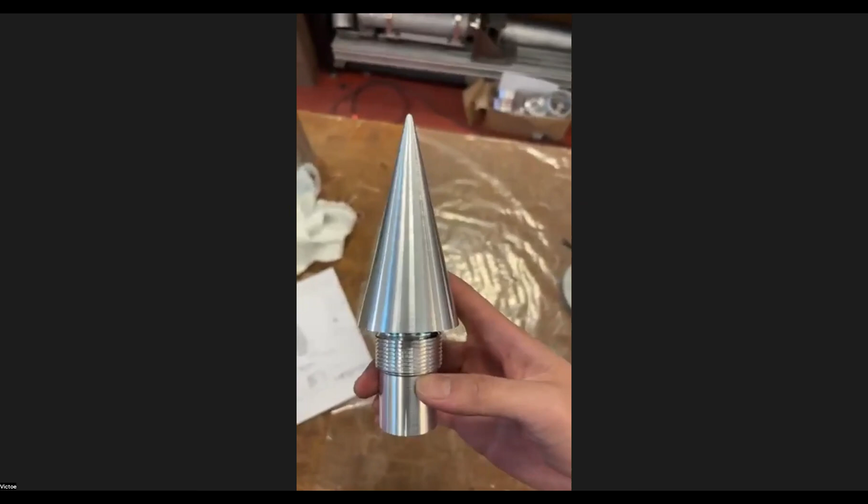Hang on just a second. I am looking for how I can change my view so I can just be looking at you. I'm used to seeing a button that will give me a speaker view, and I'm not seeing that now. In the top right-hand corner for me, next to the recording button, there's a button that says view, and you can choose it from there. What I've got there instead is a leave meeting button, which I do not want to press. Are you able to right click and pin his video? Maybe just click my video and then it will pop up. Okay. Found speaker view. It was not how I expected.

Okay, so let's start over again. You were showing me the tip of the nose cone. Yeah. So it's actually 90% done. I just have to face and part off this section. This was used to hold the entire piece in a chuck. So this will be parted off by tomorrow, I think.

Because we're yet to machine the nut that holds it in, that jams it in the nose cone. But if you see it here, that will be kind of the nose cone assembly. The coupler and the nose cone are epoxied together, and this thing will be installed later, in there.

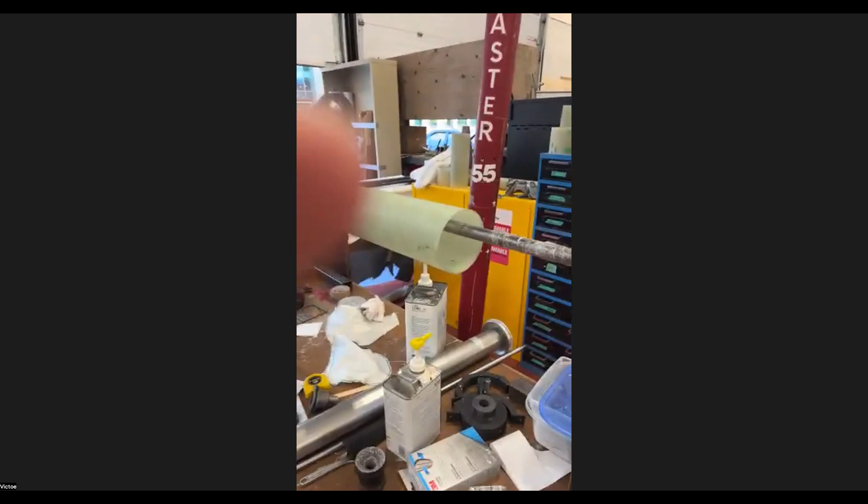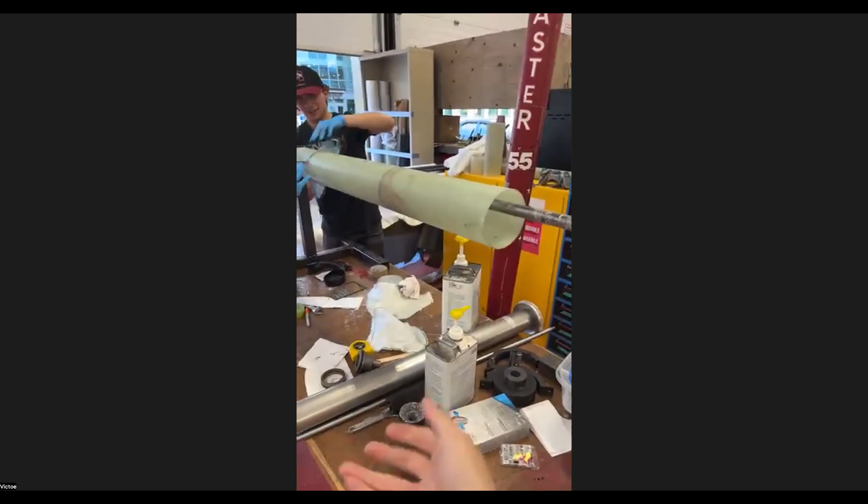Yeah, exactly. And then on the exterior surface, to keep it really consistent, we put peel ply around it, and then we use shrink tape to provide the compression, and that gives us a really smooth and even surface if we do the shrink wrap in the right way, which we seem to have figured out. And for the inner surface of a tube, let me find an example of a tube.

Here. So using the Mylar method with the mold release wax, the inner surface is really shiny and has a really good tolerance. So this was meant to be a 3-inch motor tube. What we measured is I think 3.006 or 3.008, so less than a hundredth out of tolerance on a composite part using no machinery, which I think is really acceptable. Oh yeah, that's very nice. Yeah. So that's in general how the tubes are made, including the body tube and the motor tube. And I think I can move to the bulkheads next.

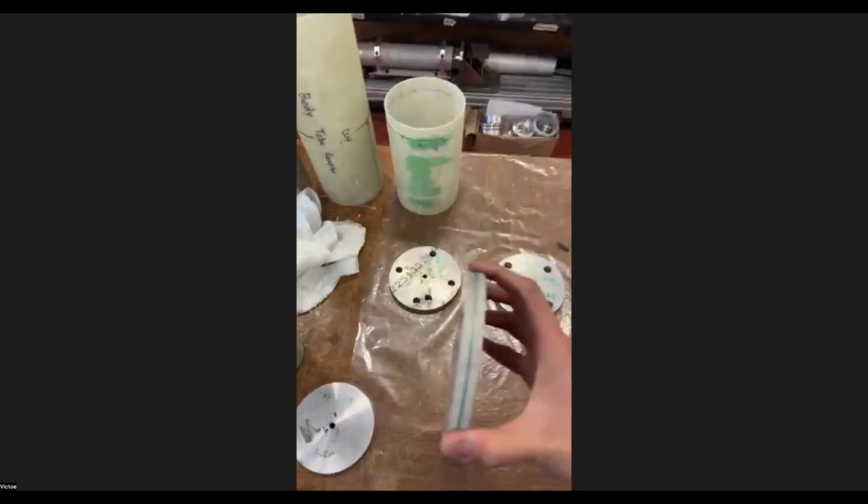So for the internal structures, we have 3 bulkheads, bottom, middle, and top. These are the exact same part as each other and are manufactured using water jet. So we have 1/2 inch thick stock that we use. The reason for half inch is because last year we experienced issues with shaft collar sliding due to the high forces of the launch. So this year we're drilling holes into the bulkhead and into the internal rod, so we have a physical mechanical fastening between the rod and the bulkhead.

So hopefully there will be no more sliding, and everything in the bulkhead and the internal structure has, I believe, at least a 1.5 safety factor. So we have room to spare should there be any problems. And propulsion bulkhead, same thing, just no holes. It's faced off of the round stock, and we machined the outside diameter to be smaller than the coupler, so it's able to be fitted in the motor once the coupler is installed. And there's just a 3/16 tapped hole for the eye bolt. 3/16? 3/8, sorry, 3/8-16. Yeah, my bad.

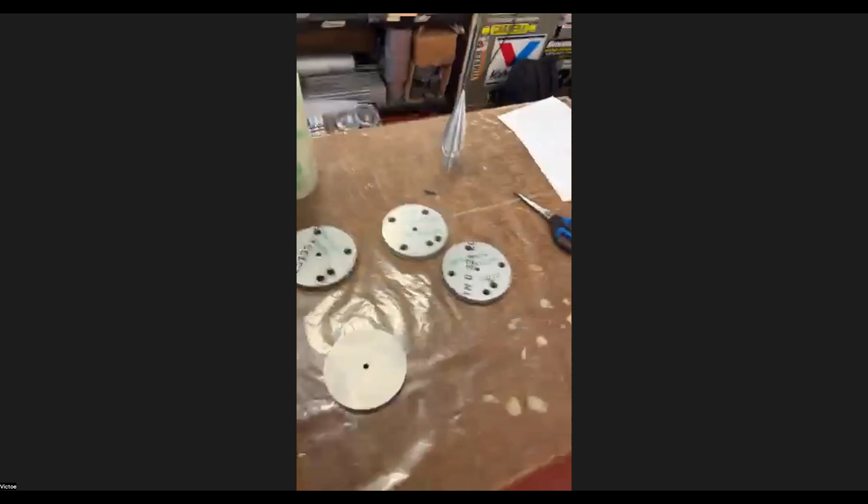And as for the... I'm sorry, curious. Go ahead. Yes. The other three bulkheads you were using screws to anchor. Are you doing that with this one as well? No, this propulsion bulkhead gets held in position by the motor tube. So between the propulsion bulkhead and the thrust plate down below, it squeezes or locates the motor where it needs to be with the help from the motor tube. Okay.

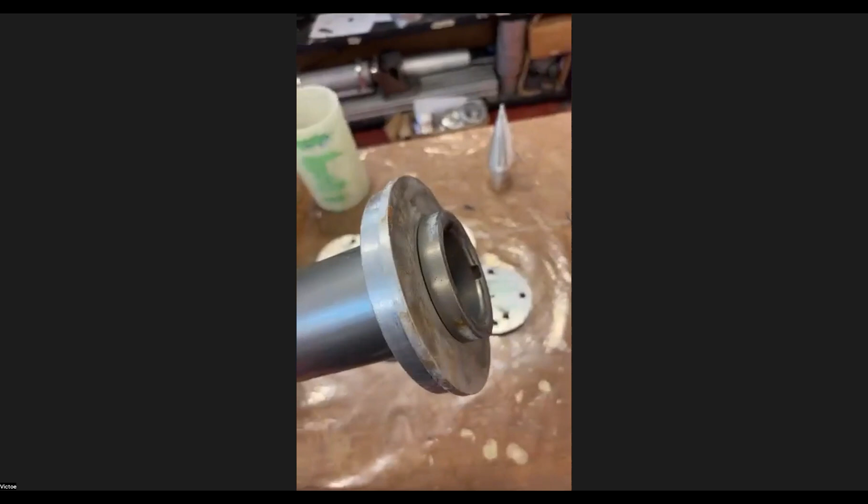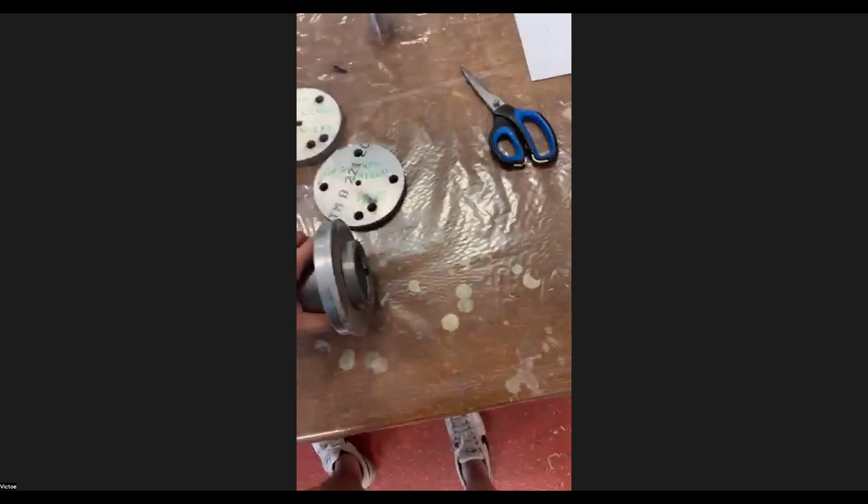And then just to mention, these materials are all 6061 aluminum just to keep the weight down a little bit. And the thrust plate was the exact same design as last year. In fact, this is the exact same part that we plan to use because it worked well and we haven't changed the design much this year. Our goal for this year was to optimize the manufacturing process and to improve the tolerance and quality, which we definitely did. So that's why some of the parts have slightly optimized designs, while the other parts remain basically unchanged, to conform with our target for this year. Right.

So that is, and also the fins. So the fins are currently being worked on. But I do have a test sample here that we cut some tensile testing pieces out of. This one is overly thick, I think about 6 millimeter. The real fin we use is 3 millimeter, and it's a composite of twill and forged carbon. So we have 5 layers of forged carbon with 4 layers of twill sandwiched in between.

The reason why we went with forged is because it has a good omnidirectional strength characteristic, and to strengthen the fin to help it fight against fluttering, we have twill running parallel and perpendicular to the direction of travel of the rocket. How thick a fin did you use last year? I think last year it was 3 millimeter, but it was optimized to a lesser degree where we had fewer layers of twill inside.

Okay, 3 millimeter just sounds a little thin. Yeah, we did our calculation, and plus we're using tip to tip layup, so it should provide us with enough room to spare. Speaking of the calculation, I remember in your report it looked like you were using the old Apogee calculation, the Apogee Peak of Flight newsletter calculation, which has that factor of a square root 2 error.

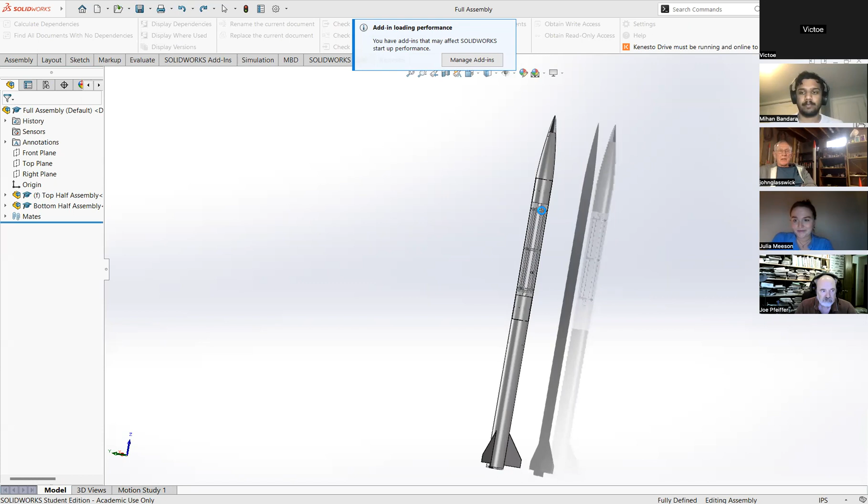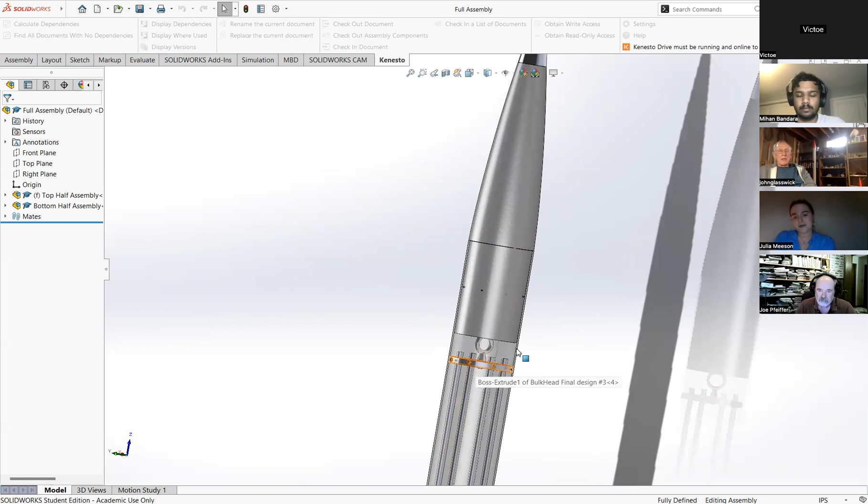As it's loading, you can already see we have the bulkheads here, and this was our top bulkhead that Mihan was talking about. The parachute is going to sit in the bay here, and the wire is going to this bulkhead and not going up through the nose. Perfect, yeah. The funny thing is that the Open Rocket 3D view is pretty much easier to see than the SolidWorks.

Is there any other part of the SolidWorks you'd want me to show you while I have it up? I don't think so, I think I'm understanding what's happening here. All right, awesome, I will stop sharing.

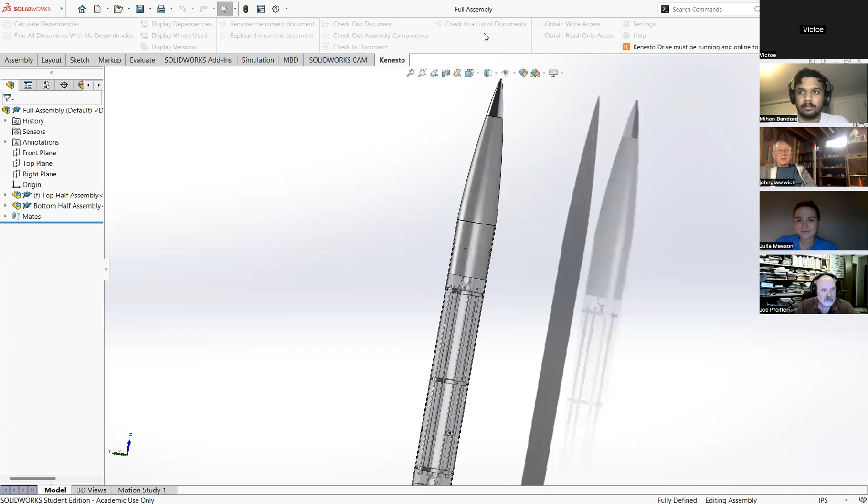So you're using black powder ejection charges? Yep, we're using four: two primary and two backup. One for main, one for drogue, and then a primary and backup for each. The drogue is in the middle of the rocket, and the main is at the end, near the nose cone. And the altimeters are what? So we have the Easy Mini, and then we also have a SRAD version that will be the backup.

That reminds me, you did a good job explaining how you derived the black powder charge, assuming I think it was 8 shear pins. Yeah, we've actually lowered that because we realized eight is overkill and hard to align. The reason we had eight in the past is our bay was too small, so we were worried pins would pop out by the parachute. But this year we redesigned our rocket and made the bay bigger, so we won't have that issue anymore. So we reduced the amount of pins and redid the calculations for black powder based on that. It wasn't a huge difference, but we did redo it.

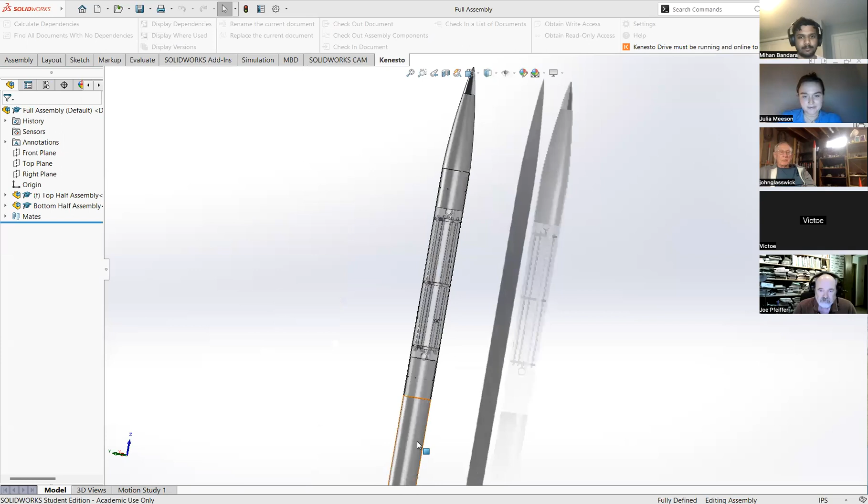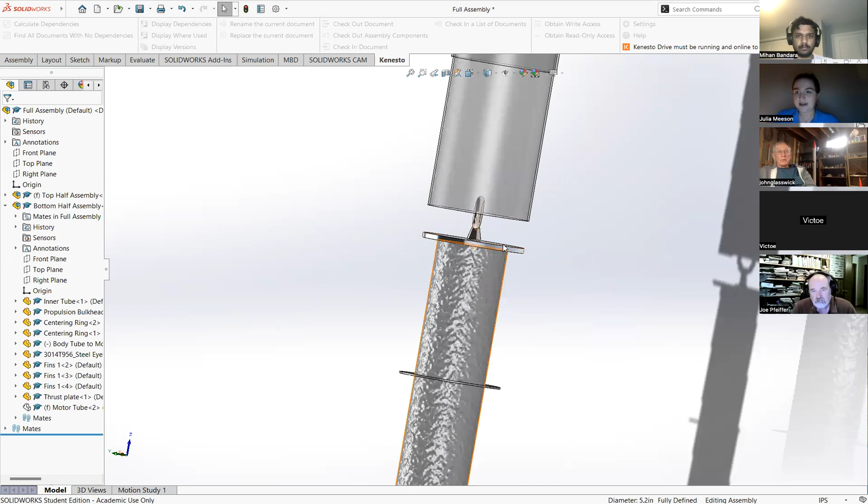Our motor, I can probably share my screen, that will help a little bit. So this is our motor tube at the bottom here, obviously. I just hid the tube, but you can see here we have our internal motor tube, and this is where our motor slots into. This is the propulsion bulkhead at the top, which Victor showed a little while ago. That threaded hole in the middle is for an eye bolt, which will thread into the motor tube. Our centering rings keep our inner motor tube in place. And then at the bottom we have our... oh my goodness, sorry, lack of a mouse.

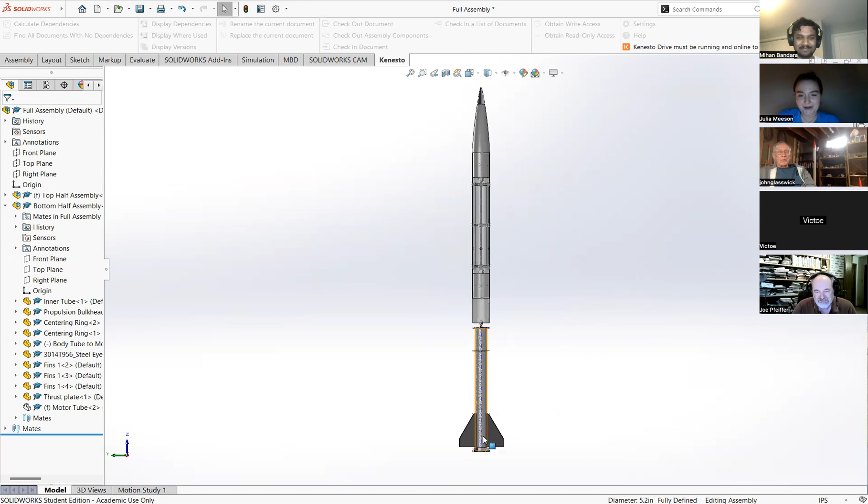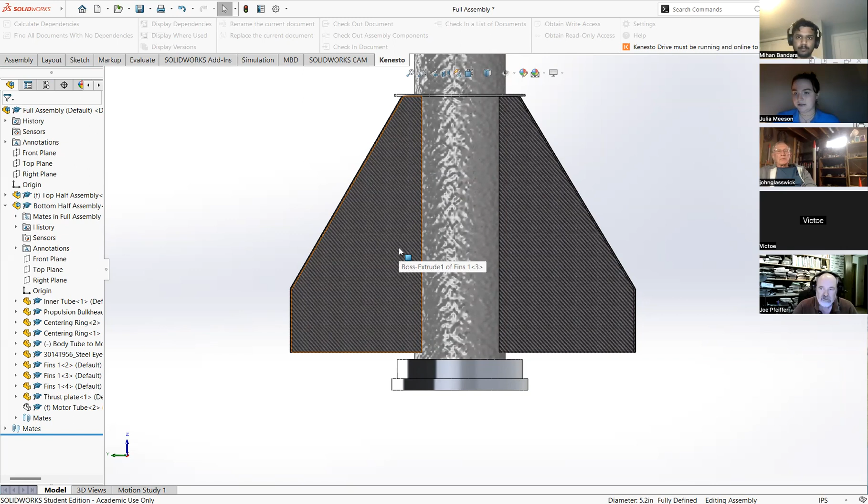And then at the bottom we have our thrust plate, which Victor also showed, and that has the push up against the bottom of the rocket, and then our fins that are actually going to our structure as well. And Victor can probably speak to more of the manufacturing if you have more questions about the epoxy and stuff. But that's the rough overview of the design and how it's held in. Right, but the answer to the actual question is you're using the 3/8 bolt up at the top.

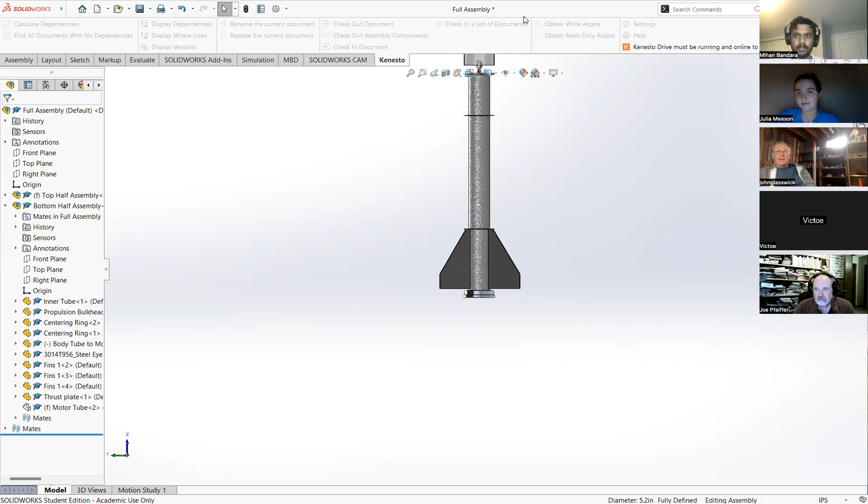Yeah, that's correct. How are you keeping the eye bolt from spinning when the drogue comes out? How do you keep it from unscrewing? Are you putting a pin through it, or... In the past, we've just used Loctite, but that's just the way we've done it in the past, to be completely honest. If you have the opportunity, drill a hole and put a pin through the rod and the eye bolt just to keep it from turning at all.

Well, Loctite. Is it an eye bolt or an eye nut and a rod? So it is the eye bolt directly threaded into the motor. However, the propulsion bulkhead is also threaded, so that acts as a jam nut. That together with the Loctite should keep everything in place, and there's probably a really small chance that it can come out in that environment. Yeah. So a pin wouldn't be helpful there, but a safety wire wouldn't hurt. Yep, for sure. We'll take that into account.

Where do you usually thread the safety wire? Is it through the eye bolt? Oh, put a little screw off to the side in your bulkhead, and then put some baling wire through the eye bolt, and then around the other screw. Got it. And I say a screw, but even a wimpy eye bolt would be a good way to do it. Yep, for sure. Okay, I'll note that down. Thank you.